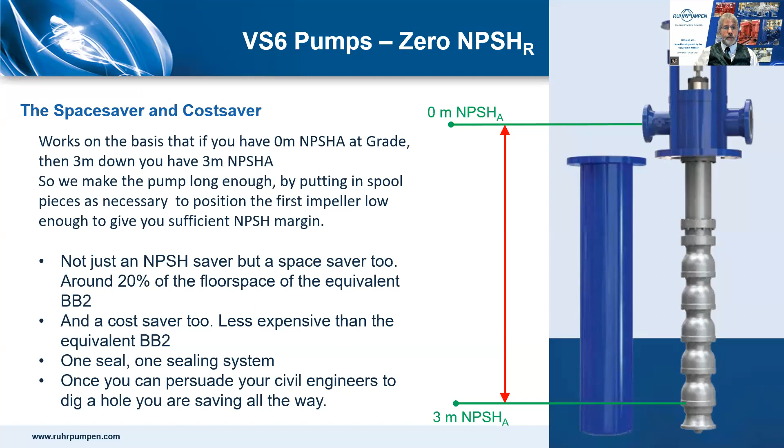The American design was a spin-off from borehole pumps, which are widely used across the Americas. With borehole installations, you're trying to get as much water as possible out of as small a diameter well as possible, and you're looking to maximize efficiency. The length of the pump, length of the bowl assembly, the number of stages is not an issue. Hence the Francis vane: high capacity, small diameter, high efficiency, lower head per stage.

European manufacturers were not big in borehole pumps. We have plenty of surface water in Western and Northern Europe, so VS6 pumps were developed from horizontal process pumps rather than from borehole designs. So they became radial designs. They tend to be shorter, fewer stages, and bigger diameter than their American counterparts. Also, being radial impellers, they have flatter curves, about a 25% head rise, compared with about a 40% head rise to shut off on Francis vane.

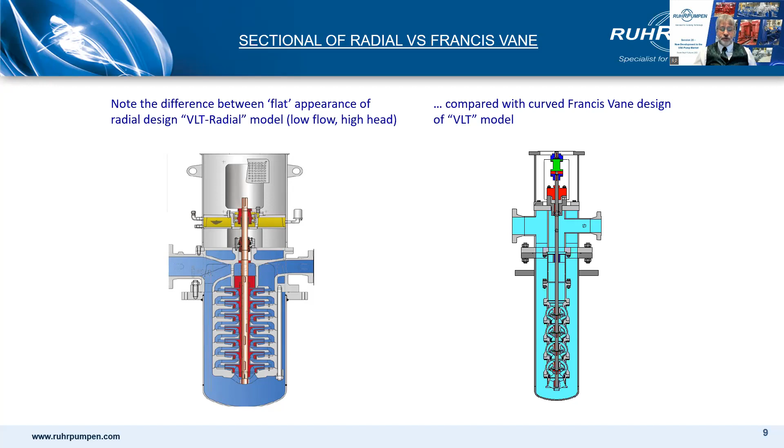Ruhrpumpen has both designs available: our German heritage pump in the radial range, and our American Byron-Jackson heritage design in the Francis vane. So we can offer the best fit for any given situation.

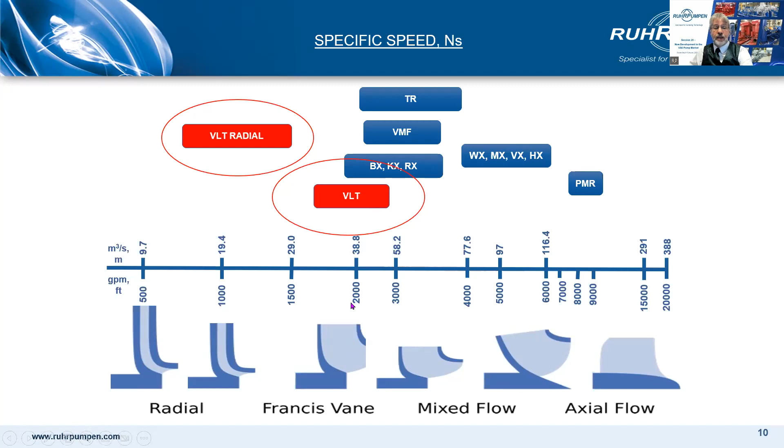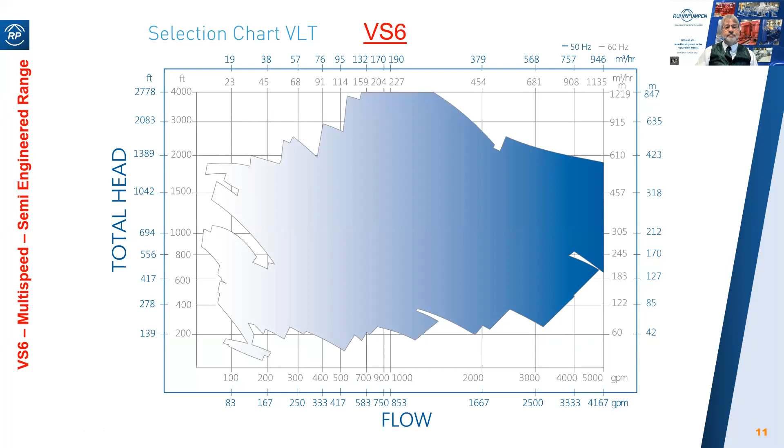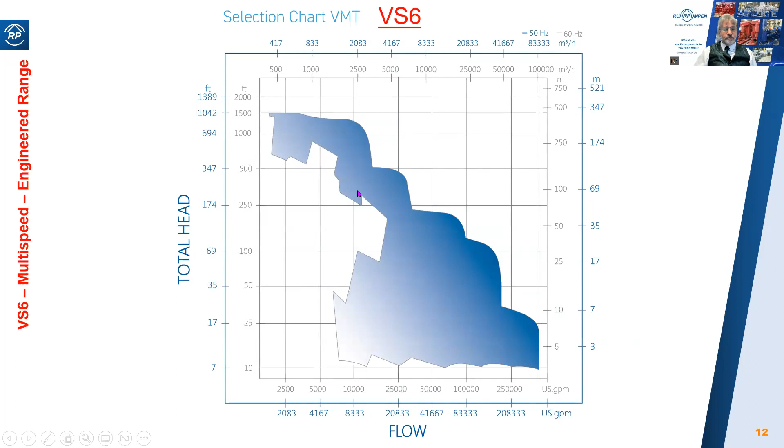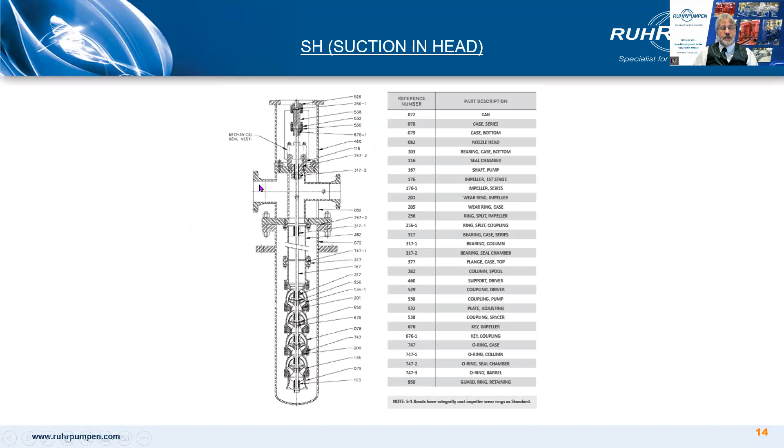Pumps are available with above ground suction, like this, or below ground suction. It depends how the user is running his pipework. Process pumps are almost always above ground. Below ground tends to be used more in water service.

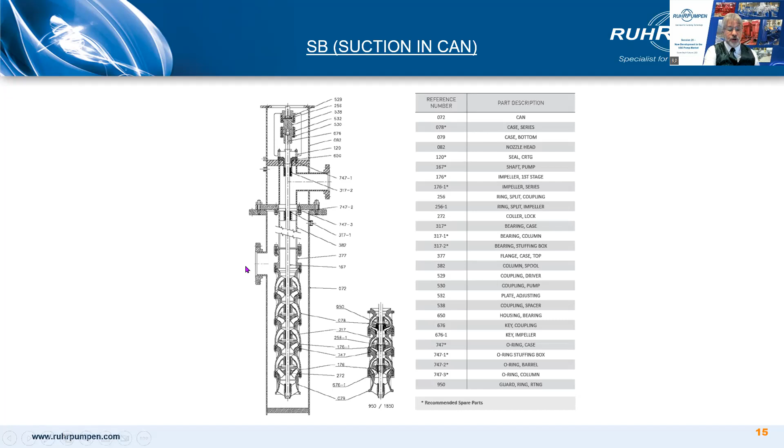Now, in establishing the NPSH available, you specifying engineers need to think a little when you calculate your system NPSH. You frequently tell us on the data sheets the NPSH available at the center line of the suction here, which means you're assuming a value for this dimension. It's better that you give us the NPSH available at grade at this point, and we will calculate the required length to put the first stage impeller at to give you the margin you require, the NPSH margin.

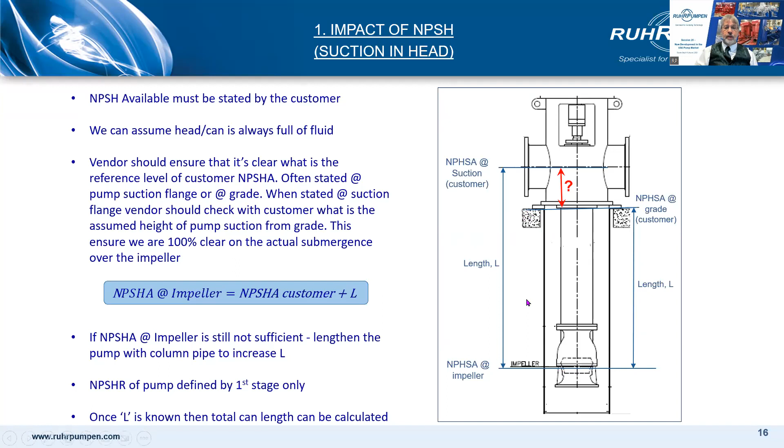With the above ground suction, we do want you to tell us the NPSH available at the suction flange, because you know where that is. That's a positive location. We then will calculate the length required to give you the NPSH margin required.

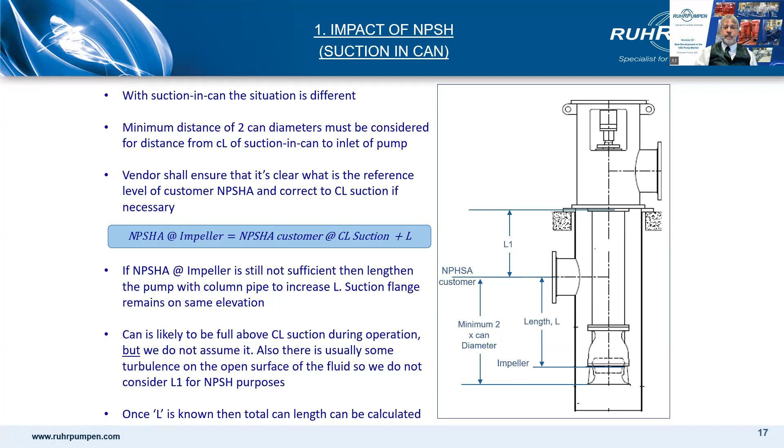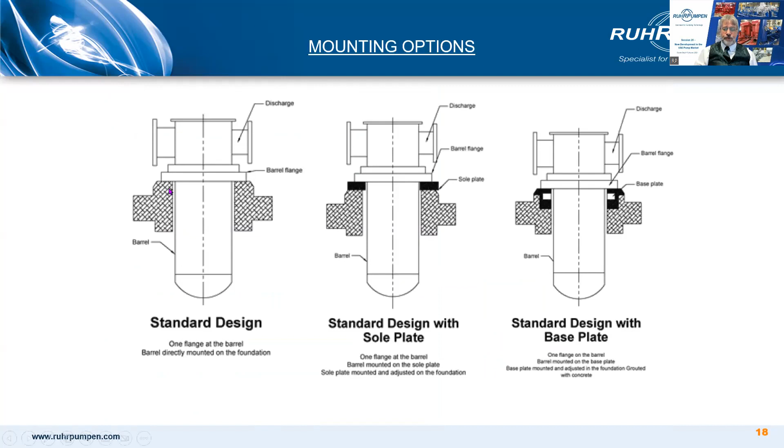Mounting options, there are 4 of them. First, the square mounting flange on the barrel, this one, is set directly on prepared foundations. So there's your square mounting flange here of the barrel, set directly on the prepared foundations. Number 2, we supply a square sole plate, which is set in the foundation when it is poured, and the square barrel flange sits on top of that.

Third option would be a steel channel frame, a base plate effectively, and again it is set into the foundation when it's poured, and the square mounting flange sits on top of that. The fourth option is a separate mounting flange. This was a requirement of API 610 8th edition, and it allowed for through bolting for the head and barrel flange rather than captive bolts as shown here. This is no longer a requirement of API, but many pump specs have that left in there as a hangover from 8th edition. They haven't really updated it.

The pump comes in API version and non-API version. The non-API, which is usually in water service, will probably have threaded cast iron bowls, although it can have flanged steel bowls. It will also have integral wear rings, and the impellers will be secured by taper lock bushes.

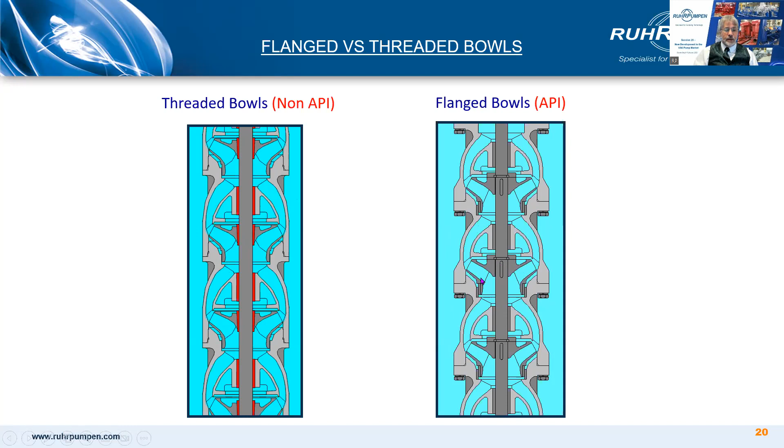The oil and gas industry is very suspicious of inducers, and many specs still forbid them.

Here are the main features of an API VLT VS6 pump. The fabrications will all be to ASME Section 8 and will have code-certified welding. It will have weld neck flanges and full penetration welds, which allow you to carry out radiography or LPE, MPE of the welds. It may well have a surface mounting flange left over from the 8th edition requirement. It will certainly have split ring and key impeller mounting, flanged bowls, and separate impeller and case wear rings.

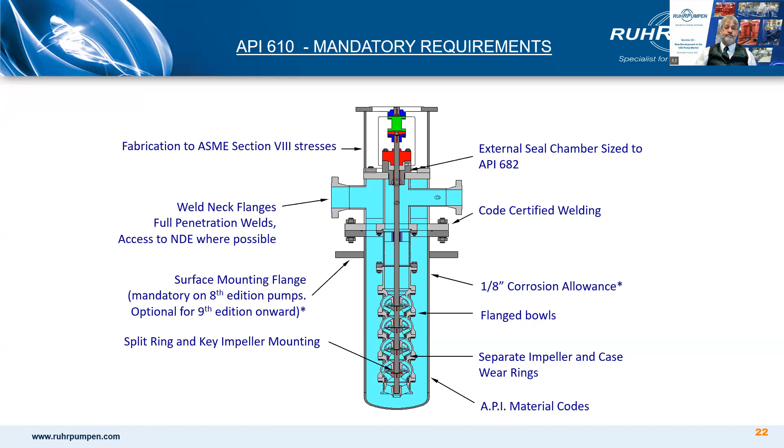Here are some more features on the left and the corresponding benefits on the right. I won't bother to read the slide - I'll leave it up on the screen for a little while and let you read it for yourselves.

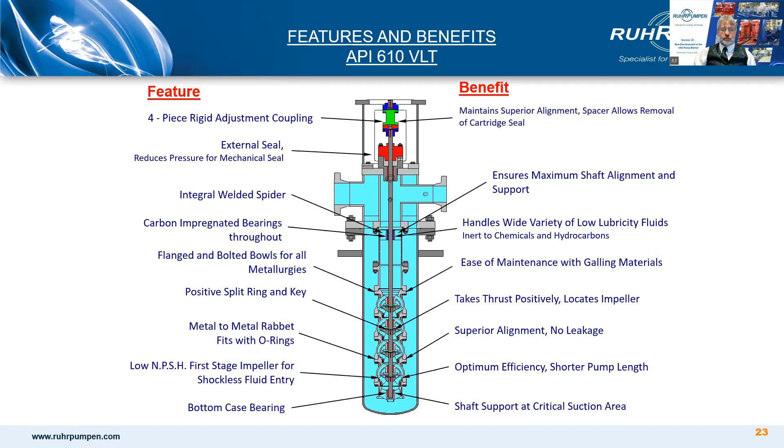Here are some of the differences between the European, the radial, and the American Francis vane designs. In the European design, tie bolts are most commonly applied, and when lengthening the pump for NPSH reasons, they usually lower just the first stage rather than the entire rotating element. And as European motors seldom accommodate thrust, the thrust bearing is built into the standard pump.

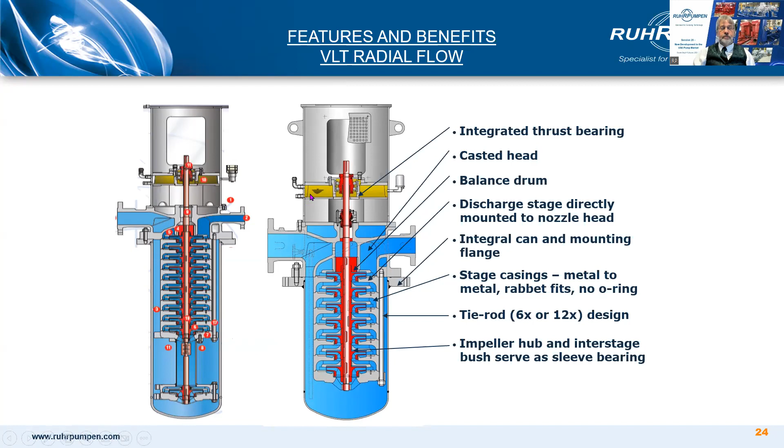Looking now at the commercial VLT, the non-API pump. It has cost savings built in for this less arduous and hazardous service pump. So we'll have slip-on flanges, integral wear rings, and collet-mounted impellers, for example. It's commonly used in condensate water service, but it's perfectly suitable for hydrocarbon service as long as API 610 is not specified. It'll give you cost savings of about 25% over an API pump.

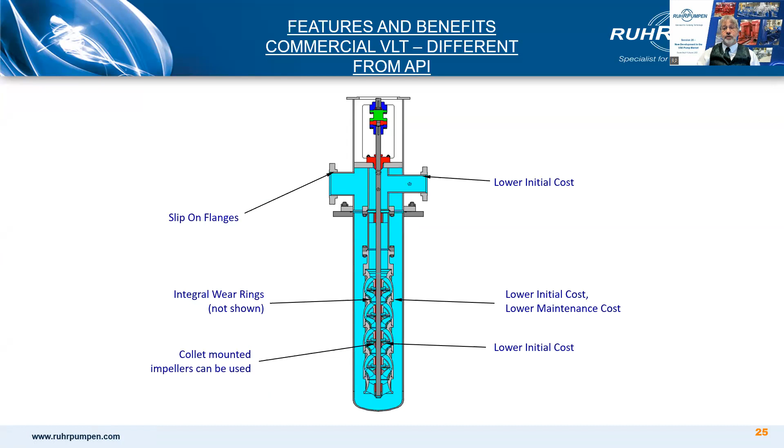Looking a little more in detail at collet-mounted impellers versus split ring and key. Collet-mounted impellers drive a taper collet into the bore on the impeller. It's easy for assembly and disassembly, positively ensures the positioning of the impeller, and it's lower cost than the alternative, which is the split ring and key. That offers the advantages of being an absolutely positive retention, and it's less susceptible to loosening when subject to shock load. That's a requirement of API 610.

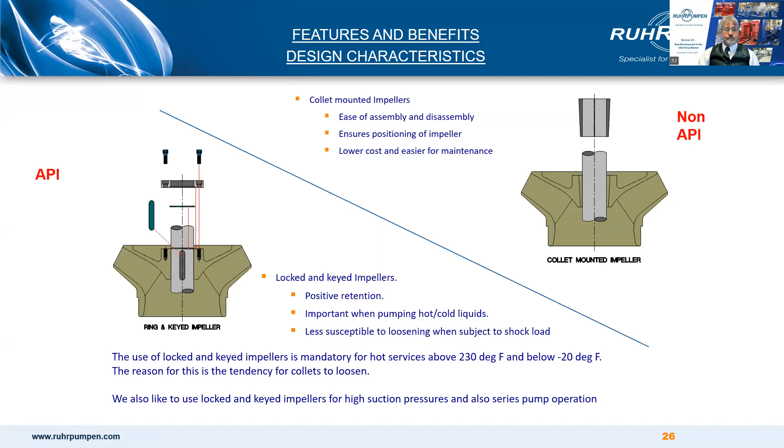Now we'll look at integral wear rings versus renewable wear rings. You always have renewable wear rings on an API pump by code. But on our non-API offering, we encourage integral wear rings initially when you buy the pump as a new pump. When the first major overhaul occurs, probably 5 years down the line, you machine and fit bowl wear rings at that time. Then at the second major overhaul, probably about 10 years, you machine and fit impeller wear rings.

Now, technically on an API pump, you could have integral wear rings, because per API you only need to have provision to fit replaceable wear rings in the future. So you could choose integral wear rings and do the same retrofit later. But in practice, nearly every spec specifies that you shall have renewable wear rings on the new pump.

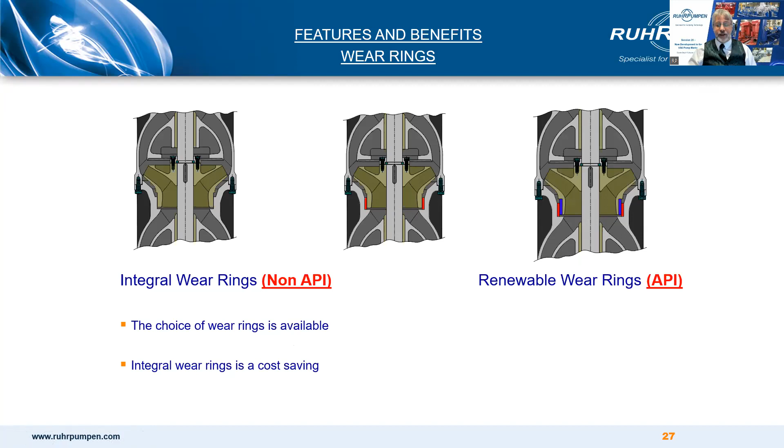Looking now at the nozzle head - well, being a fabrication, we can design and build it pretty much any way you want or specify. So 300-pound flanges, 600-pound, 900-pound. It could be designed rated for the suction pressure with only the discharge area rated for discharge pressure, or the whole fabrication can be rated for full discharge.

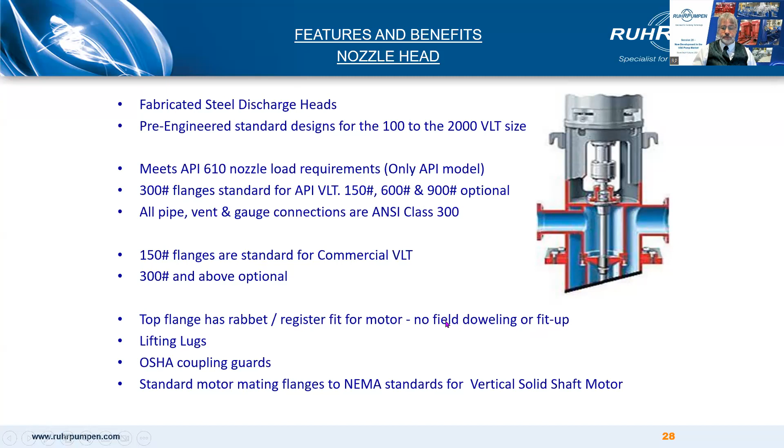The barrel on the API pump has an elliptical end, which allows us to put a full penetration weld at the bottom. The non-API version uses a flat plate bottom as standard with a fillet weld. It's a cost-saving exercise on these low-pressure pumps.

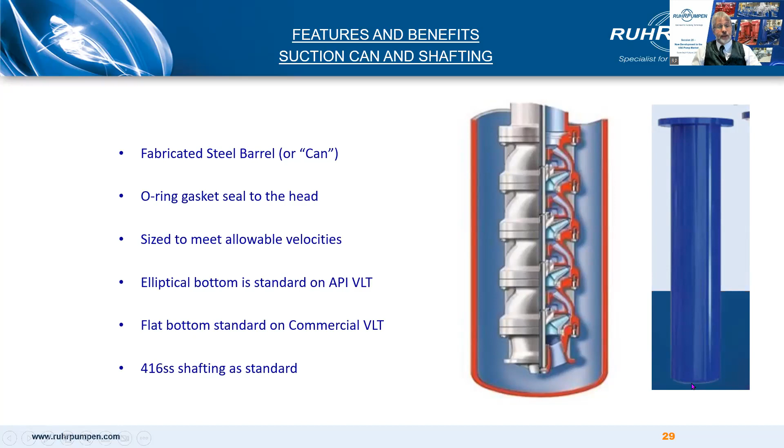Looking at the column pipe, here we're looking at the end of a column section. What you see is the bearing spider, which is integrally welded and machined at the same time as the column flange. This ensures perfect alignment, which is very important when a pump can easily be 30 feet long and running at 3,600 RPM.

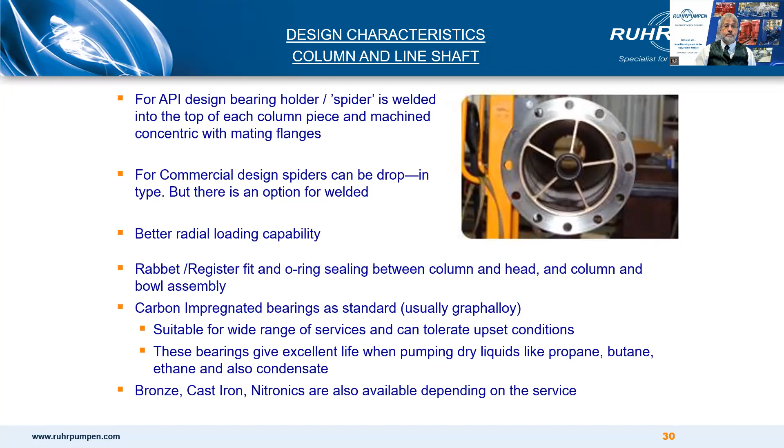The sealing options. The API version has seal chambers suitable for API 682 seals.

VS6 pumps most commonly have a single seal with a Plan 13 sealing system, which is a flush from the seal chamber back to suction. They frequently have tandem dual unpressurized seals, which will use Plans 13 and 52. And double seals, dual pressurized seals, will use Plan 53A or 53B.

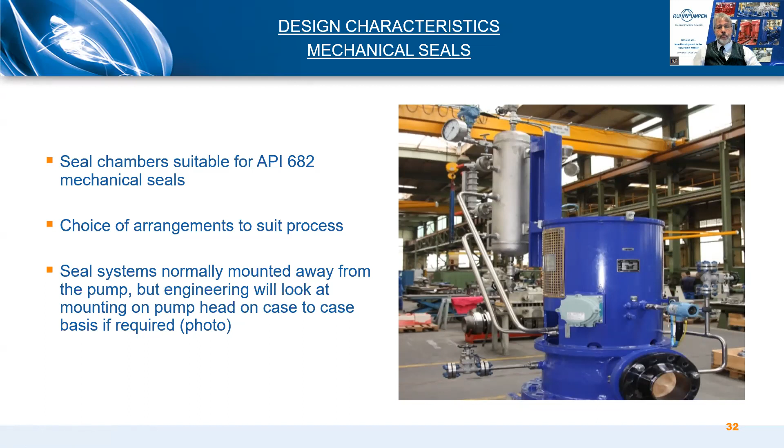Now, if this doesn't provide sufficient vapor pressure margin, then adding a Plan 11 will raise the seal chamber pressure and ensure vaporization doesn't occur between the seal faces. So Plan 11 plus Plan 13 equals Plan 14. The arithmetic's a bit dodgy there, isn't it? But never mind. Most commonly, this will be required in very low head pumps, which aren't generating much differential pressure.

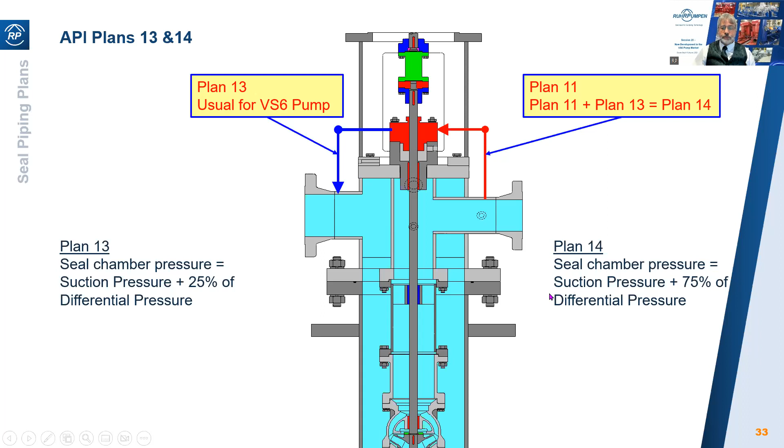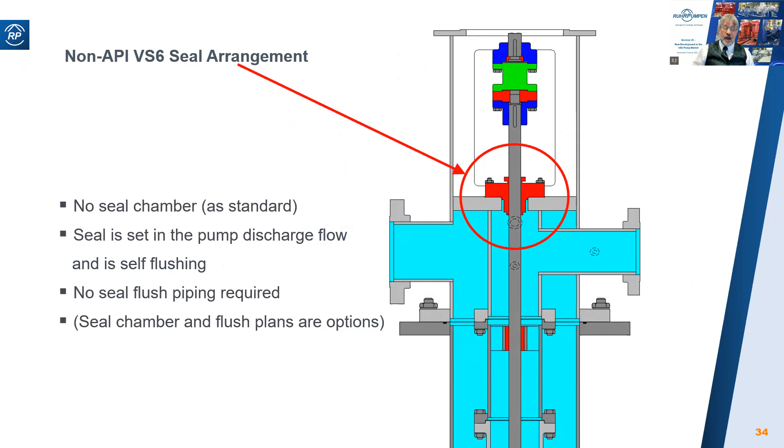On the non-API pump, the base design is with no specific seal chamber. The single seal is set in the pump discharge flow, which lubricates and cools the seal faces. The seal sees full discharge pressure in this configuration and needs no seal flush piping. But seal chambers and seal flush piping are available when requested, and of course are needed if you're going to fit tandem or double seals.

Here is the Plan 52. It's used on tandem or dual unpressurized seals. You will have a Plan 13 on the inboard seal, and the Plan 52 provides a flush to the outboard seal, which will sweep away any leakage past the inboard seal.

Now, if this leakage is in the liquid phase, the level in the reservoir will gradually raise and it will trigger an alarm. If the leakage, on the other hand, is in the vapor phase, as it might be on an ethane or propane pump, then the pressure in the vessel will rise and trigger an alarm.

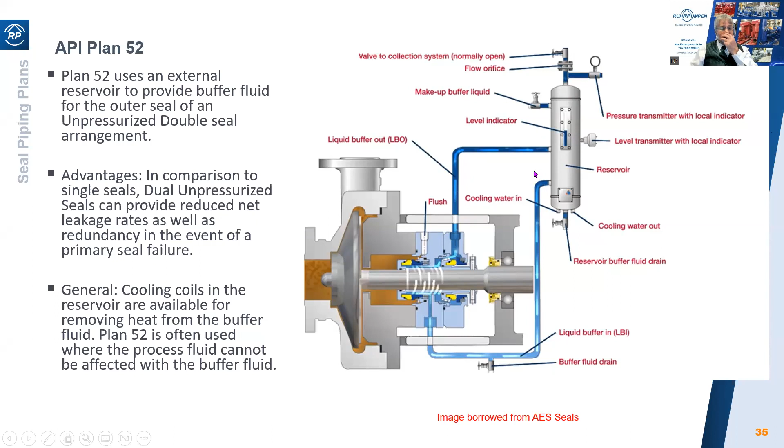Commonly supplied also would be a double seal with Plan 53, Plan 53A in this instance, like a Plan 52, but this time it's pressurized with nitrogen. The barrier fluid lubricates and flushes both the inboard and the outboard seals. So leakage is therefore either into the pump or out to atmosphere.

Barrier fluid must be compatible with the process fluid and it must be non-hazardous. Any seal leakage will trigger a low-level alarm.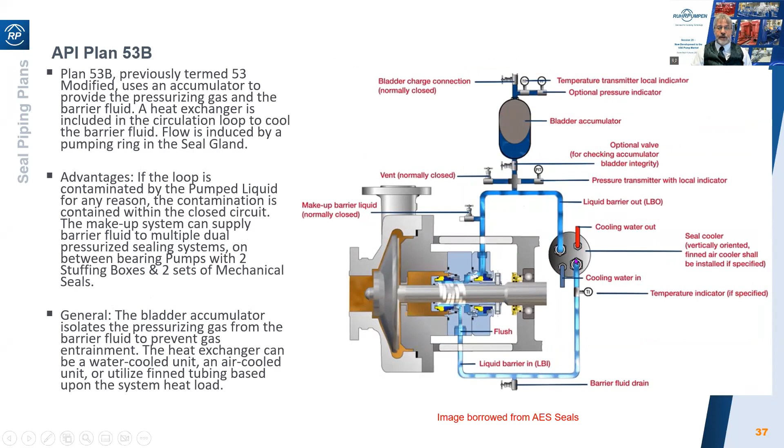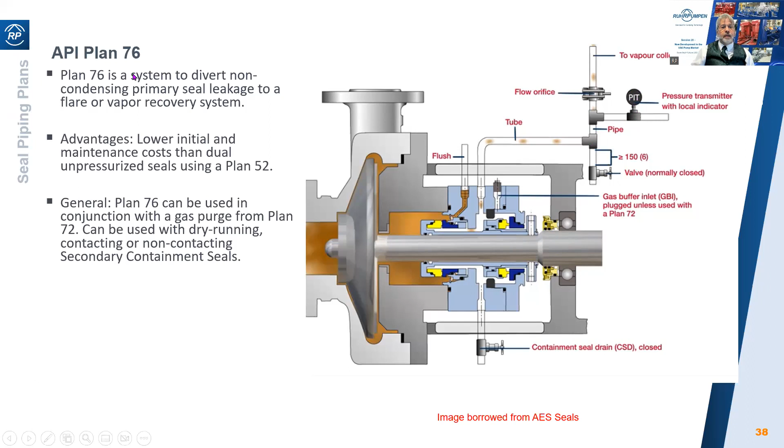It's Plan 76. Plan 75 detects seal leakage in the liquid phase by means of a collection pot and level transmitter. So this would be more practical in, say, a butane pump, where any leakage would be in the liquid phase.

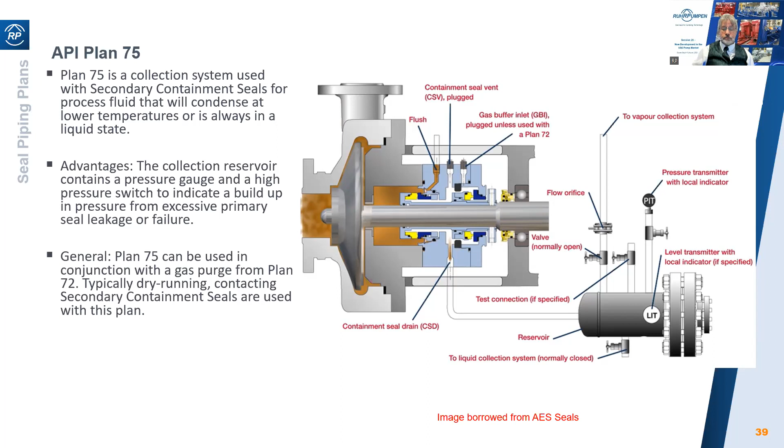You can also have a Plan 72 used with dry running gas backup seal, of course, and it flushes the space between the primary and backup seals, reduces fugitive emissions, and prevents icing in cold pumps. It would usually be used with a 75 or 76 to detect the primary seal failure.

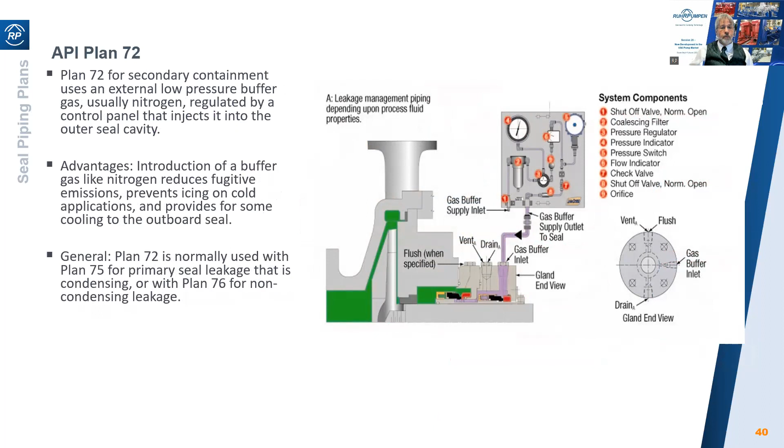I mentioned earlier that the base design for the American designed VS6 is with thrust taken in the motor. But most European and Asian motor suppliers don't have this construction as standard, so we have an optional construction with a thrust bearing in the pump.

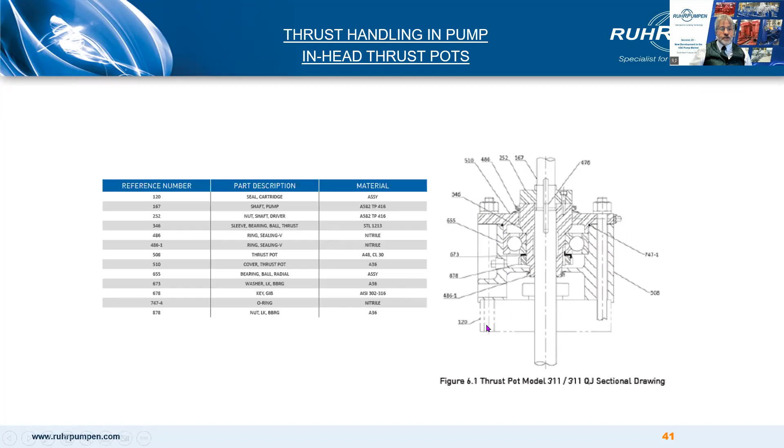Here's a grease lubricated bearing used on the smaller sizes. You'll see it sits on top of the mechanical seal flange, like this, and like this.

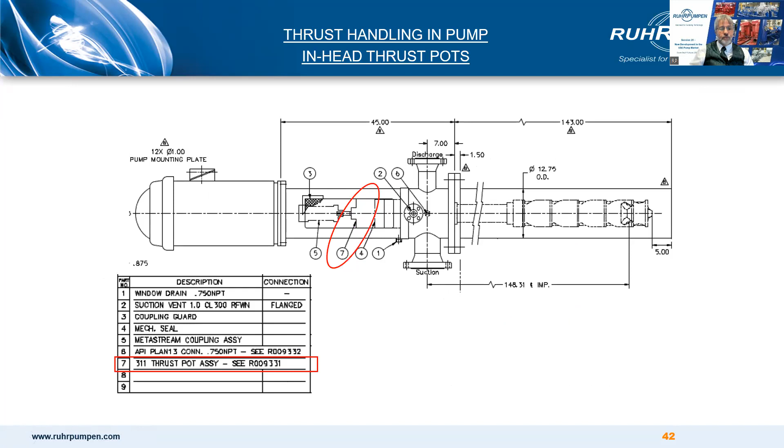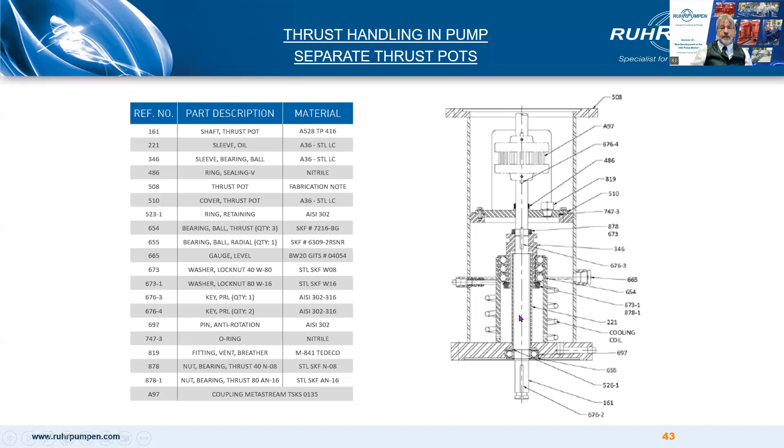For the larger pumps, we have an oil lubricated bearing built into the motor stand, like this, and as shown here. There's the thrust pot, and here.

Now moving on to the new development, as I promised. The new development for us is a QuickShip VLT. Quite a few suppliers have a QuickShip offering, so you might well be forgiven for saying, what's so special here? But this one is more comprehensive than anything else on the market.

Most offer little more than a QuickShip bowl assembly, but the Ruhrpumpen QuickShip gives you a fully compliant API 610 12th edition pump set. It's built as a semi-engineered package with limited but still extensive options. It's for the full range, 21 pump sizes, 35 hydraulics, up to 1,000 cubic meters an hour and 850 meters head at 50 hertz, or 5,000 gallons, 4,000 feet at 60 hertz.

Delivery time is 18 weeks for a complete pump. That's ex works after receipt of order. This is a conservative promise of 18 weeks. We are actually planning to do it in the future in 15 weeks, but we're starting the program off with 18 weeks to be safe. And a bowl assembly would be 8 weeks.

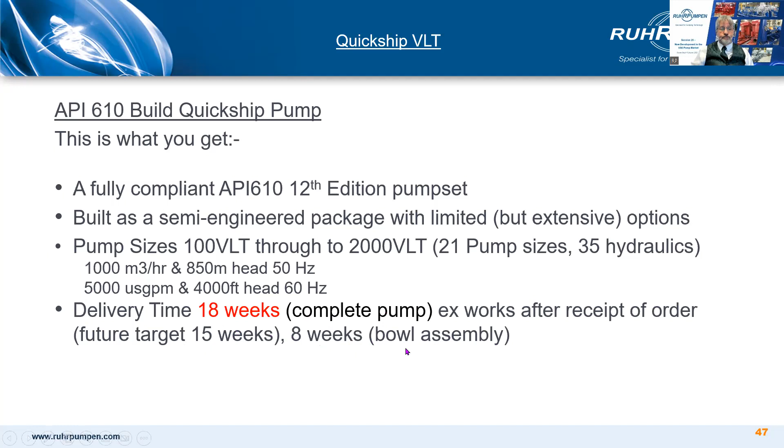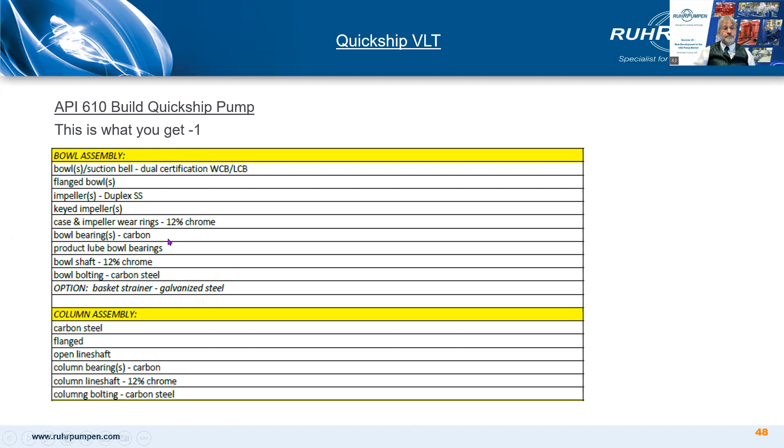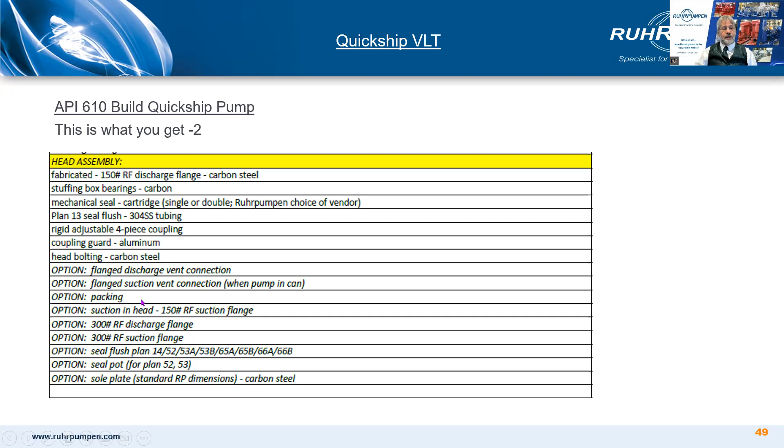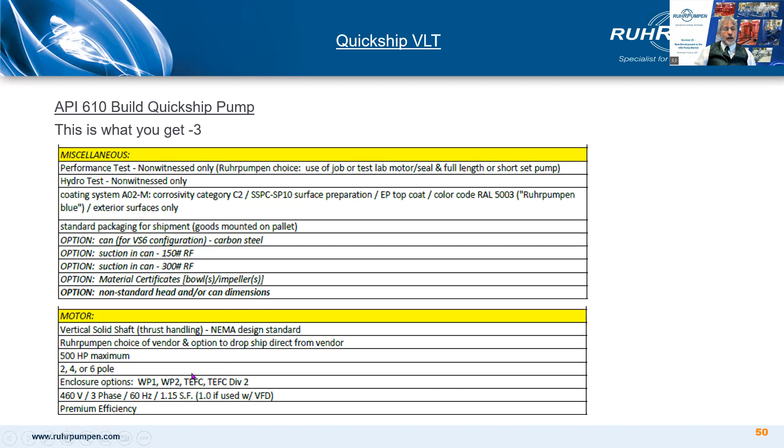This one's quite a big deal. It's a big advantage over other pump vendors in the market. Motors. The setup here is around American motor suppliers and specifications. I'll address this some more in just a minute. The documentation is limited but fairly extensive. I think you'll agree.

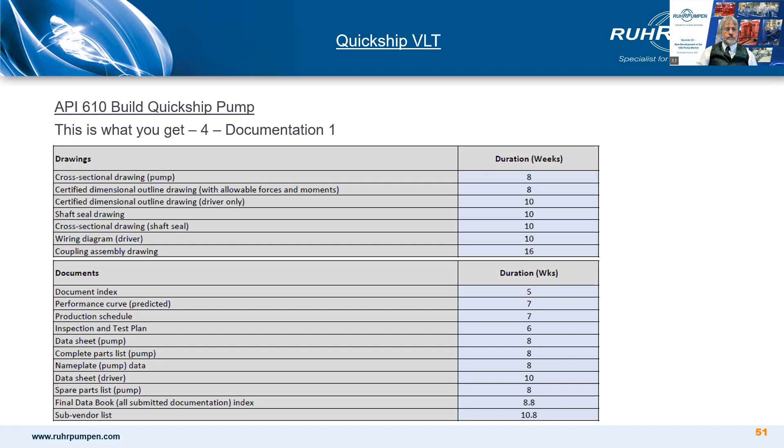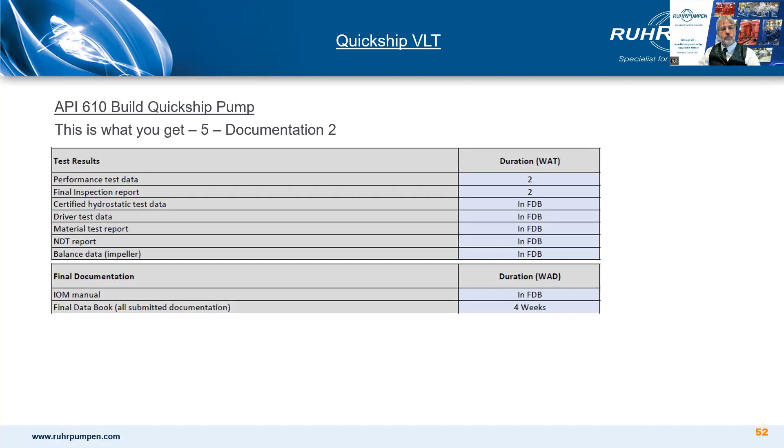So that's what you do get with the QuickShip package. This is what you don't get. You don't get a bespoke documentation package. You get just this fairly extensive but limited documentation.

You don't get any witnessed or observed testing. This is because we might carry out the testing on a Saturday or on second shift. We might rearrange testing time at little or no notice. So there really is no possibility in an 18-week delivery window to give you advance warning of a date for even an observed test, never mind a witness test. So no witnessed or observed testing in the QuickShip program.

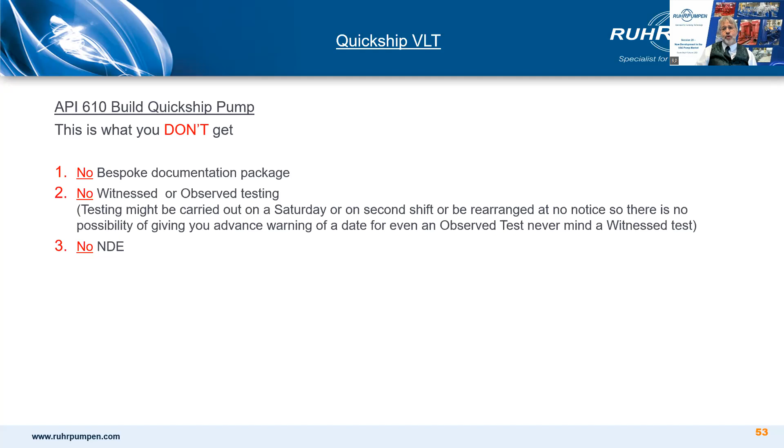Similarly, no NDE. No time for it in an 18-week delivery time. We don't accept customer specifications with the purchase order. Now, at proposal stage, these will be reviewed, commented, and agreed, and a detailed scope of supply. So an agreed scope of supply. That can appear in the purchase order, but that will be it. It must be a standalone document. We won't be re-reviewing at manufacturing stage specifications. It will just be meeting the agreed scope of supply in the PO document.

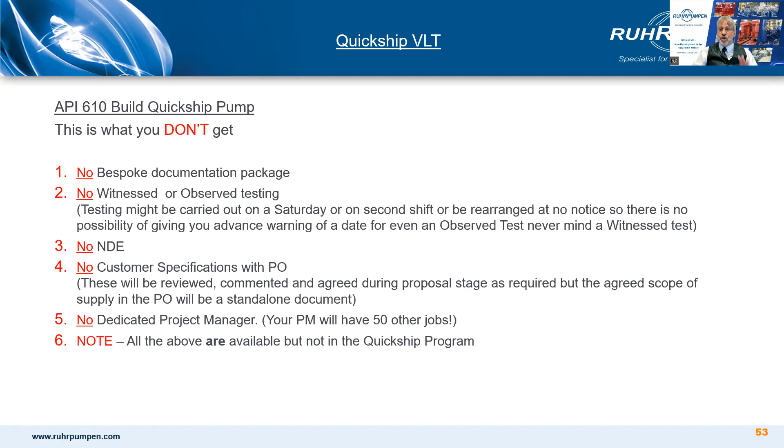You won't get a dedicated project manager. Your project manager will probably have a couple of them for the whole scheme, and they'll have something like 50 other jobs. So they won't be giving you the individual attention that you get with a long lead time, standard pump. But the important thing is all of these are available, just not within the QuickShip program. So if you can live with 36 weeks for a pump, then you can have all the options you like. You can have all the NDE you like. You can get all the documentation you like, just not within the QuickShip program.

Now, these limitations then make this QuickShip program more applicable to end user purchasers than to EPC contractors. You EPC contractors are usually constrained by project specs and project requirements, especially on documentation and inspection.

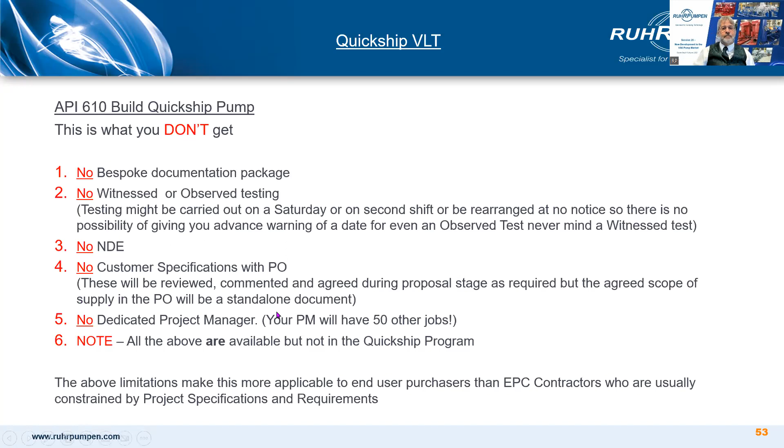This program has been rolled out initially predominantly for the North American market. For Europe, Middle East, Africa, and Asia, it will need some tweaking. For example, it doesn't currently allow for European and Asian IEC design and supply motors, doesn't allow for separate thrust pots, it doesn't allow for flanged and welded seal piping, and there may be other essential Europe, Middle East, Africa, and Asia requirements that we haven't necessarily thought of. So it's down to you to tell us what is an essential thing that should be in a QuickShip program to make it usable for you. If the demand is there, then the program will be expanded to suit this Europe, Middle East, Africa, and Asia market.

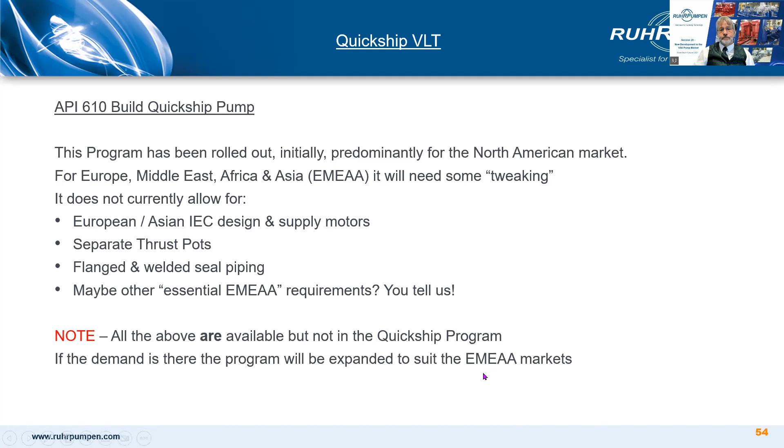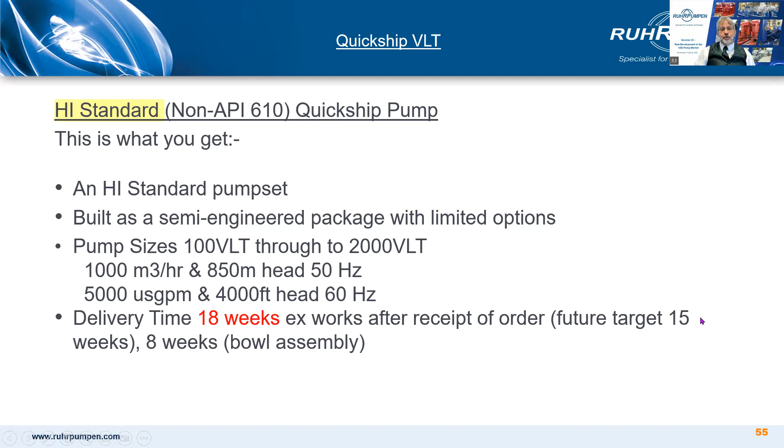Now for the non-API build pumps, the Hydraulic Institute compliant pump. Not dissimilar to the API offering, the same pump sizes and hydraulics and materials, just a few less options. The same 18-week delivery time, or 8 weeks for a bowl assembly, and in the future getting that down to 15 weeks.

Here's the detail. You'll see ductile iron is an additional material to the WCB LCB dual certified bowls. The wear rings are not included in the base price, but they are available as an option.

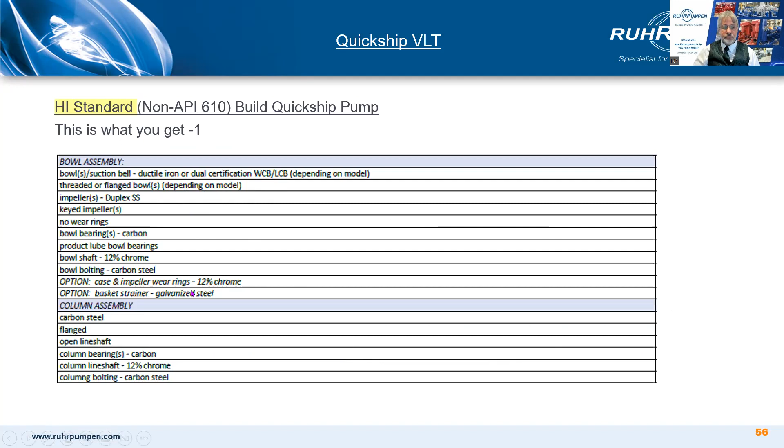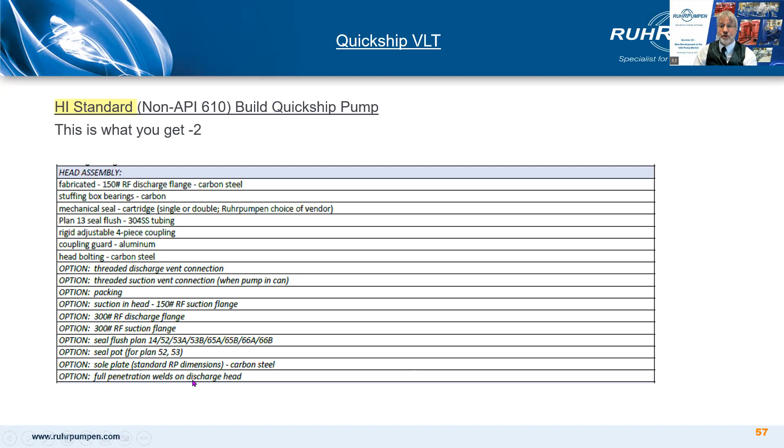The same discharge head options, with the standard being slip-on flanges to keep the price down, but there's an option for full penetration welds, bringing you closer to an API build pump.

The same epoxy paint finish, the same testing options, and the same non-standard head or barrel dimensions, which allow you to go with left-hand or right-hand pumps, and also to match existing installations.

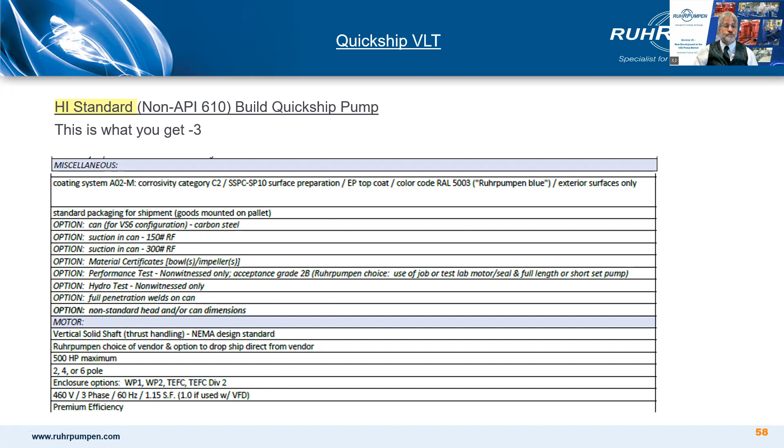The documentation is not so comprehensive as the API package, but I think that's par for the course for this commercial pump.

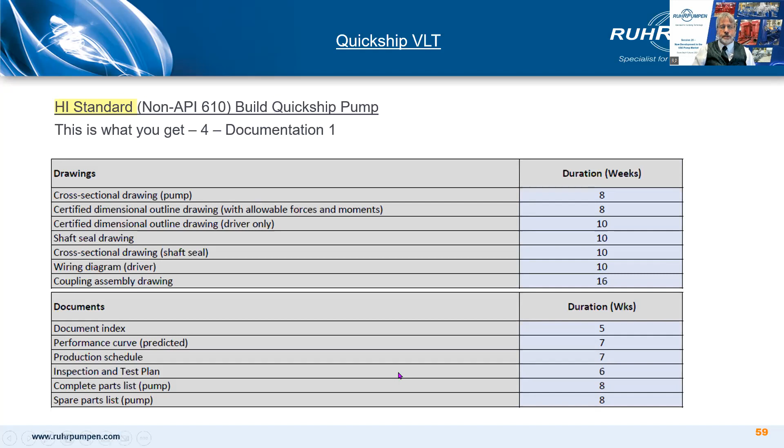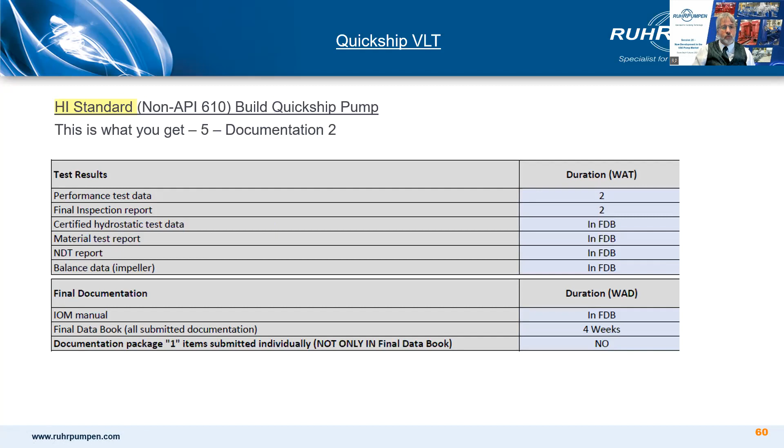Well, there we go. That pretty much concludes the fun for today.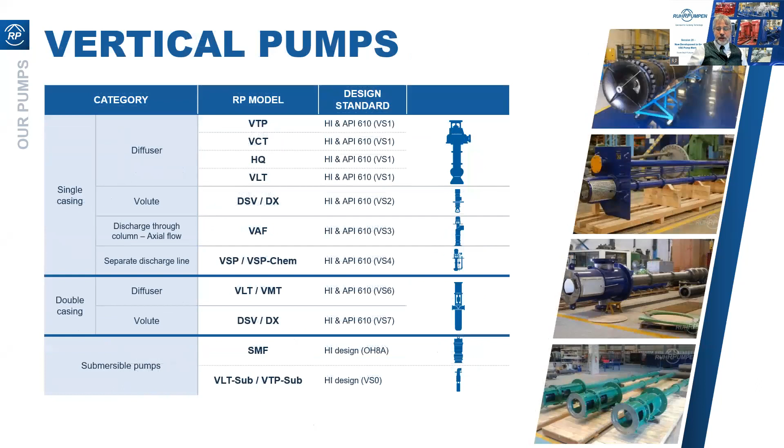So let me stop the share and let's have a look and see what has been said. Here we go. First, we've got quite a few questions, 17 of them here it looks like.

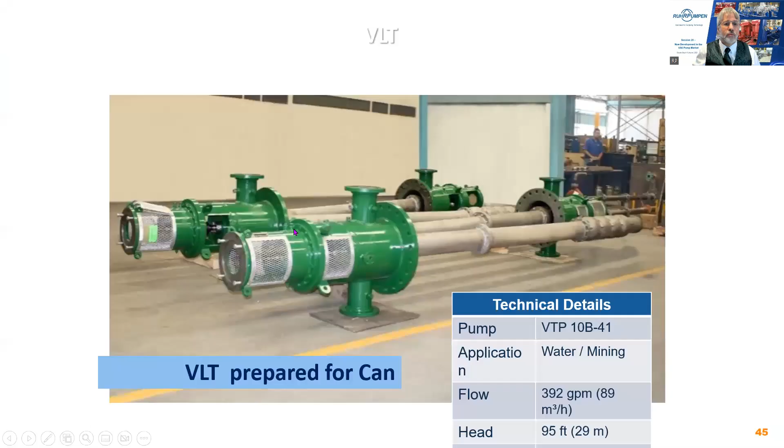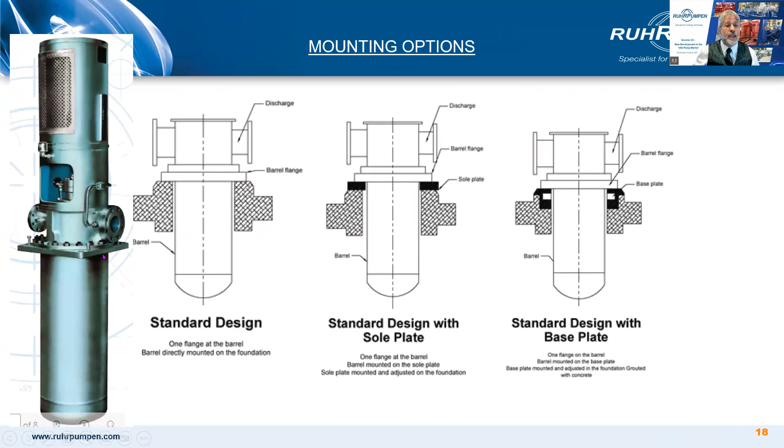There we go, best seen here. This is the mounting flange, and it is welded. It is the top flange of the suction can. There it is. And in the separate mounting flange, this flange is welded to the barrel.

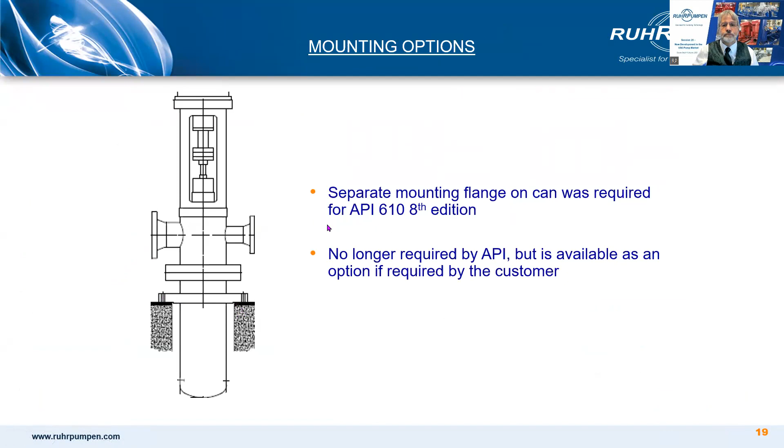Rakesh Chowdhury asks, are there allowable nozzle loads applicable with water service canned pumps with the suction nozzle on the can underground? If not, how can the piping loads be taken? It follows the API nozzle loads. But you should always well support your suction piping. It should be designed to minimize these nozzle loads, but it does allow for API nozzle loads.

Ashish Patel, question on construction. Can a VLT pump be steam traced? This question is mainly regarding application of fluid which is congealing in nature and having very low NPSH available. Yes, there's no reason why we couldn't design the pump with heat tracing.

Mayo Barahate asks, what will be the nozzle loads on the underground suction VS6 pump? Will it be zero or some positive loads? As I just answered, it will be per API 610.

Rajiv Jain asks, what kind of lubrication is followed for the bearing? The line shaft bearings and the bowl bearings are product lubricated. They're sleeve bearings made of carbon. For the thrust bearings, if you have a separate thrust bearing, they would either be grease lubricated on the smallest sizes, or on the larger sizes, they would be oil lubricated.